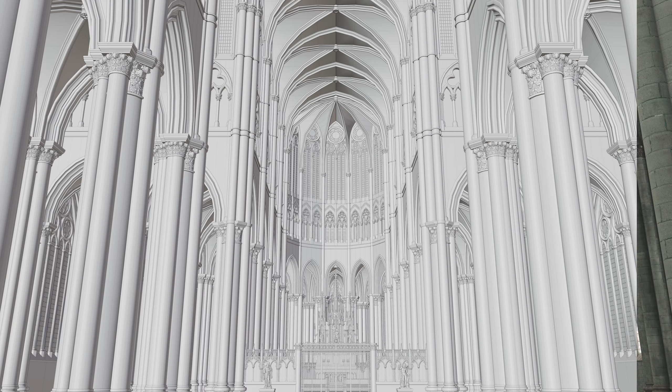These are a few clips from one of my latest projects aimed at rebuilding almost entirely a Gothic cathedral within Blender. But what does it really mean to engage into something this big, and how can we do that effectively? Let me share my perspective.

First of all, these projects require quite a significant amount of effort. To give you a bit of context, building this scene took me around 60 hours of work, of which I would say approximately 80% were spent modeling, while the rest were used either texturing or lighting or compositing.

The final scene contains nearly 21,000 objects organized into 201 collections. There are as well 50 different materials in use and 126 node groups, 41 of which are geometry node systems. Now, some of these are indeed just variants, or to put it differently, duplicates of a main asset with just little tweaks, but nevertheless, these numbers should give you quite the sense of the magnitude of the work involved.

In the end, am I pleased with the final outcome? Well, as always, it's a yes and no. One of the most difficult parts in dealing with big projects in general is to keep quality consistent throughout the process, whether you are at hour 5 or at hour 50. Exhaustion can indeed kill a project.

To give you an example, I spent so much of my energies into modeling the main bits of the architecture, making sure that all the elements were arranged and interconnected in a way that would make sense, that when it came to texturing, for instance, the stained glasses, which is a big part for every Gothic cathedral, I really struggled in coming up with an effective workflow, even though I think I partly did in the end, to the point I have been on the edge a couple of times about whether to skip this step altogether.

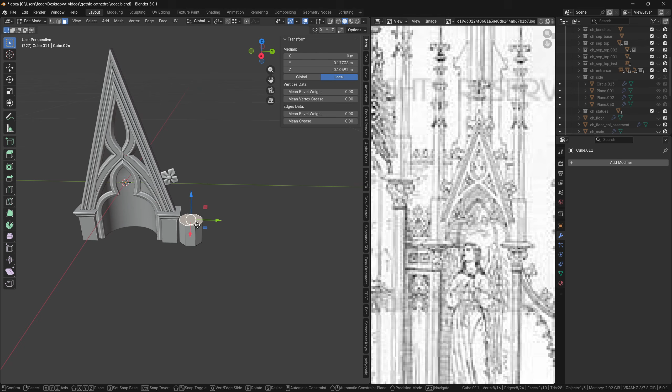So yes, in undertaking a big task, the first thing to me would be to be aware, prepared and trained in advance to face the amount of effort that that specific project will likely require. The second important element is to have some degree of visual clarity about the final intended result. Needless to say, some time needs indeed to be spent into the research department. For this purpose, I generally leverage tools like Pinterest to create some boards and start exploring references.

I even have a specific board called Hooks, in which I save images I may not be directly interested in, but that serve as a sort of an entry point thematically into a specific concept or visual representation I want to expand upon. Having said that, my target for this project wasn't anything specific, as it would have been instead in a proper replica, but rather a custom cathedral with inspiration being taken from different real sites. To mention a few, the cathedrals of Amiens and Reims in France and Cologne in Germany.

Aside from references, one essential bit of the entire planning process is always to be aware as much as possible of what one is really looking and getting into. If I had to state it explicitly, it would go like this. To make it, you need first to be able to name it.

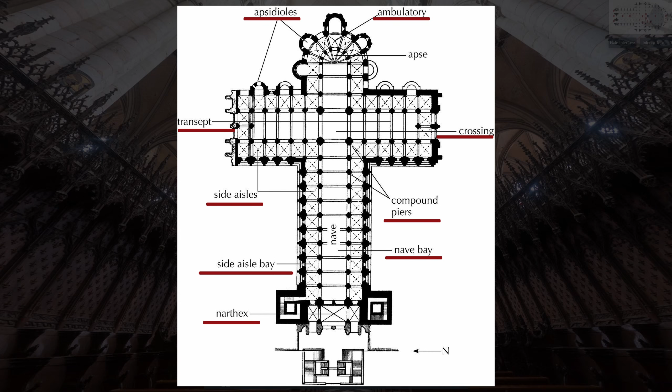This is not simply a mere exercise in style, but more that the moment you become aware of the presence of a certain specific element or component within a more complex structure, knowing its name is a solid proof to yourself that you will properly account for that element, whether in your modeling or texturing process. This usually draws a line between a final output that appears plausible and one which seems to be okay, but for which you can't really put your finger on what is actually off.

Given that, I started the whole process by taking a floor plan of a cathedral, Amiens in this case, trying to figure out my portion of interest. Based on my personal perception and taste, the choir and the apse would be the most interesting parts.

Not to disregard the rose windows, which are indeed peculiar in a Gothic cathedral, but I really wanted to come up with a final shot that would emphasize the concept of spatial depth and dimension, moving from the central nave, where I would put my main camera, crossing the transept into the choir, then into the apse through the ambulatory, and finally peeking into the chapels.

So I knew roughly that I had to reproduce this much of a cathedral, and I started looking into how to decompose this structure into its own basic elements. In particular, by looking at this section here, the central nave and the lateral aisles, it was easy to see that once built, its repetition would allow to make up for the majority of the entire composition. So I zoomed in and focused on it.

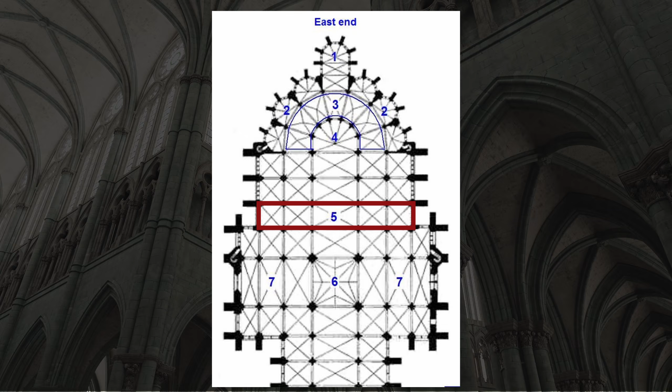And these are the basic elements I knew I had to begin with. The arcade standing on its piers, the midsection or triforium, and the clerestory with its beautiful windows and traceries. On top of everything, the ribbed vault.

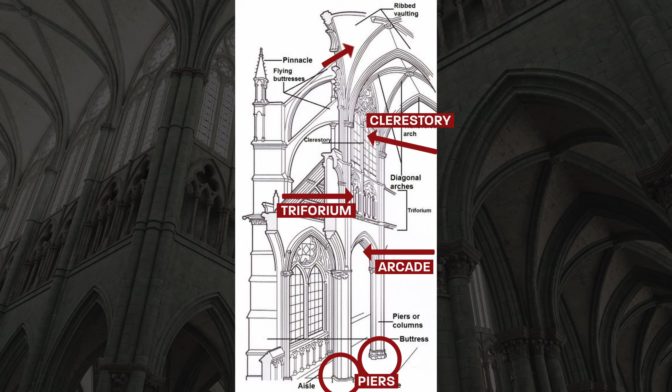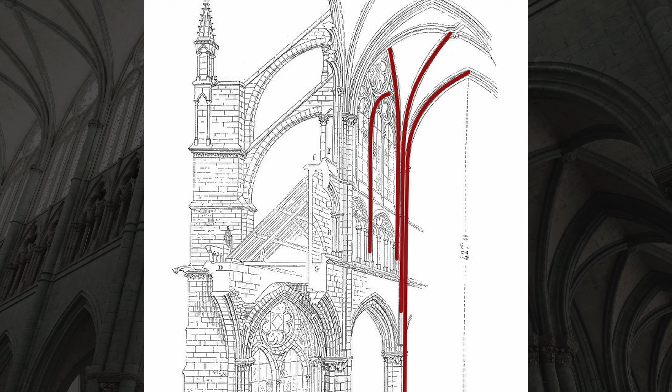And what I was particularly interested in was trying to replicate the amazing interplay of elements, with the ribs of the vault transitioning into the cluster of columns that would progressively descend down the whole structure right into the piers of the arcade. At this point, I had a plan. To start from the single constituent as to form this first composite element, which would then be used to build the main parts of the cathedral, or at least of my portion of interest.

Let's now dive a bit into the modeling part of the project. This comprises both basic modeling techniques, and I will not bore you with this. In fact, you can check this older video here in case you wish to look into any of that, and more advanced stuff. In fact, to deal with larger projects, it's always useful to have a few tricks up the sleeves. Think about, for instance, the need to optimize a scene to make it manageable also at the later stages of the process.

My first goal was to have in place all the different elements taking part in forming the nave of the cathedral with its subsections. I started almost from the ground up, building the main arcade first and then moving up to model the different pieces of the triforium. At this stage, I was just working on the basic shapes without including yet any elaborated model, such as the decorations for the columns' capitals. Let me stress how important it is to have everything properly named and diligently organized in collections.

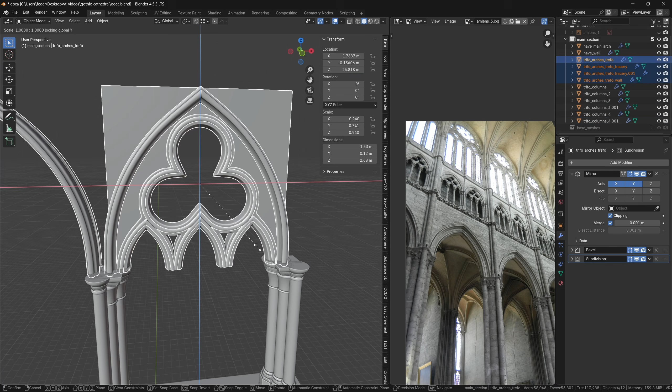After building the triforium, I moved on to the clerestory. A big part of this is modeling the different pieces of the tracery that is put together along with the windows, and I tried to do that in the most, so to speak, organic way, by having shapes that are actually connected in their own geometries, or let's say topologically, much like it is in real life. Now, this is not strictly needed, as one could simply place the different elements on top or near each other, but I thought that doing it properly would give it a visual boost, plus it is a good exercise in terms of flow and polygons management.

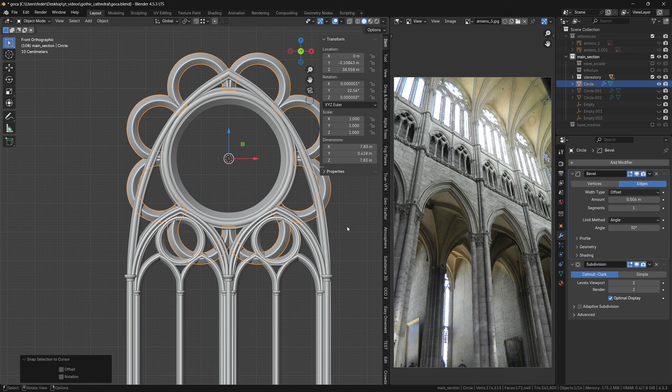As I mentioned earlier, one of my goals was to try to replicate the complex interplay of the different elements being conceptually interconnected with each other. Hence, I started working right away on all those pieces that would contribute to that overall, and that taken individually may not appear as important. In all of this, scale is essential. When I work on these kind of things, I always do that in a real-world scale. And that is going to have an impact on almost everything, from bevels to textures to the way light interacts with the models.

With the tracery done, I started adding simple planes to represent the windows. In the end, I would replace all the individual planes with just a single one, since it is easier to manage, especially when texturing stained glasses. With the clerestory done, it was time to move to the vault. Here, the technique is the one I already used in a couple of older videos, feel free to check them for reference. One little trick is in modeling the profile of the vault's ribs.

I approached it like this. I hand-modeled a piece of geometry based on the specific reference I chose, and I placed it into its own collection, to be reused later on. I then isolated just the top edge, deleted the rest, placed it at the center of the 3D space and converted it into a curve. At this point, I could take my rib, which needs to be a curve as well, and I used the profile I just created as the input in the bevel object field.

I adjusted the rotation, and to make sure it was displayed properly on the rib, I applied the scale of the latter. This, apart from being a non-destructive way of modeling, allows for great flexibility and reusability.

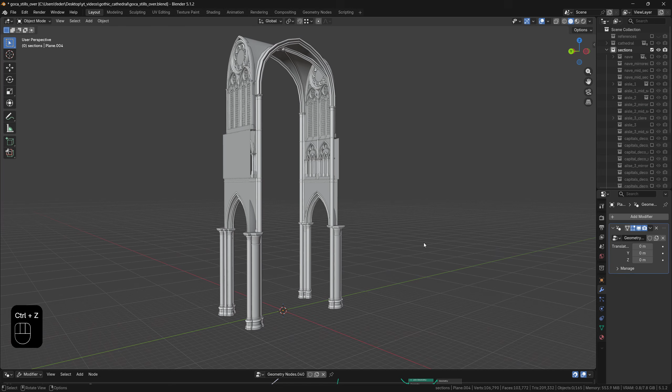Since this entire composition will need to be repeated in an array fashion to create the overall shape of the choir, I needed to account for the fact that some of the meshes are placed right at the middle of what will be the consecutive iterations of the structure. Which means that if I take everything all together and just repeat it bluntly, a part of the geometry will necessarily overlap.

To avoid this, I decided to split the block into two logical sections, isolating those meshes which lie in the middle of the block from the rest. This will allow me to manage the iterations of the two sections separately, as we will see in a minute, and avoid any geometry overlap.

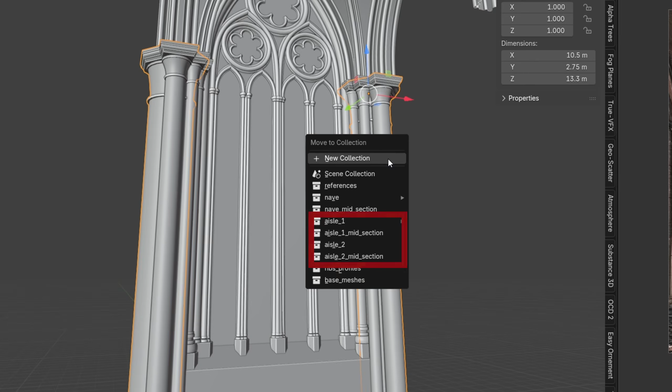With the same logic, I approached the modeling of the two aisles, again leveraging on the logical subdivision between a midsection and the rest of the structure to avoid overlapping geometry further in the process.

With the main parts basically completed, it was time now to move to some finer details, such as the decorations for the capitals. Apart from the modeling itself, which was performed along the lines of the non-destructive workflow I used for the leaves of the Corinthian capital, as demonstrated in this video here, the important bits were mainly two.

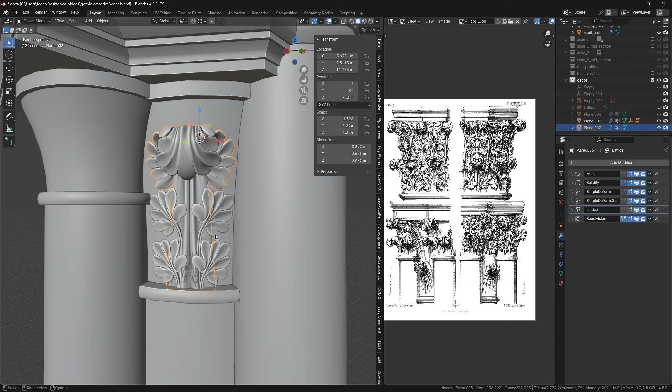The first, to apply also in this case the distinction between what will be in the middle of each repeated iteration of the block and what will not. And the second, to optimize the overall poly count.

With regards to the latter, the obvious choice was to use geometry nodes, which I used at first to build the base capital by instancing the desired amount of leaves in a circular fashion, and then to allow for multiple iterations within the scene of these base capitals with little to no increase in the amount of geometry around.

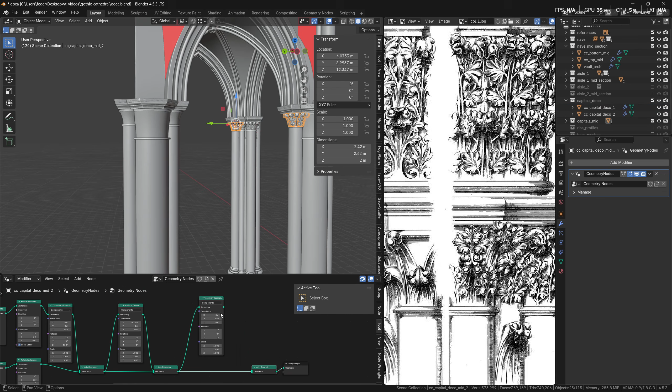The same concepts were applied for both the decorations of the columns of the piers and of the aisles, and for the decorations of the columns of the triforium and clerestory. Finally, the base structure was complete and ready to be used in the next steps.

For the choir, I created a new geometry node system. My intention was pretty clear in that I wanted to use two mesh line nodes to control separately the different collections depending on whether they belong to the midsection of the whole block or not. Hence, I started joining together the base nave and its mirror counterparts, feeding the result into the instance on points node linked to the first mesh line node.

I then duplicated both the mesh line and instance on points nodes, and I joined them back into the original branch of the node tree with a join geometry node. I would use this second branch to control the different midsections of the cathedral. With this logic, I started adding the different pieces together, including the aisles 1 and 2, again with the respective mirror instances and the decorations for the capitals as well.

With these two macro blocks ready, I could now work on increasing the iterations count for both mesh line nodes separately as to create the entire choir structure without having to deal with overlapping geometry and in an optimized way when it comes to the overall poly count of the model.

With the choir ready, I moved on and started modeling the apse. For that, the fundamental part was working on its so-called umbrella shape, and in case you might need precise guidance on this, you can reference this video here. The rest is similar to what was already shown for the nave section.

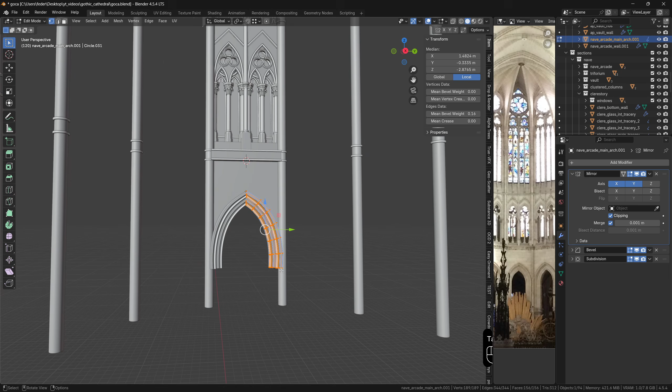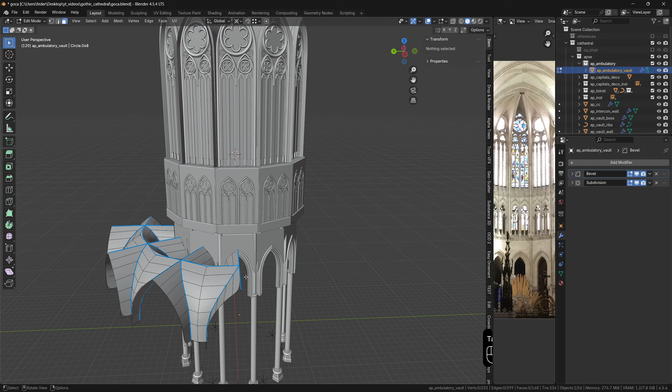In particular, I first modeled the different items of a singular section of the apse, from the clerestory to the triforium and the arcade, and this was my original collection of meshes, and I then instanced the other iterations by simply creating instances of this original collection and rotating the instances around a pivot point placed at the center of the apse itself. I then proceeded to model the ambulatory and its sets of vaults displaced around the circular shape of the apse, and finally the chapels.

The techniques I used in both cases are similar to what I did for the nave and the apse, where I leverage a lot on instances to be applied to every repeatable section as to optimize the overall poly count as much as possible, keeping the whole project manageable even with an already large number of objects in the scene.

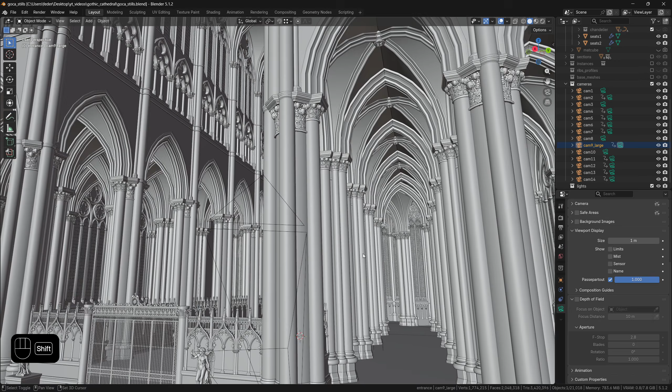Let's now talk a bit about texturing. The main materials for the cathedral are conceptually not that many. There needs to be for sure a tiled stone material, which is going to be predominant in the composition, to be applied to vaults, columns and piers, a brick and plaster material for the vaults, something for the floor, and then stained glasses. For the tiled stone material, I downloaded from the web a nice scanned set of PBR textures and I imported them into Blender.

Since I was using lots of instances throughout the composition and to avoid obvious repetitions with displayed textures, I separated the output of the texture coordinate node into the X, Y, and Z channels, and I then recombined them, adding just a bit of randomness by exploiting the random output of the object info node in combination with some math operation to be performed at each channel level.

To emphasize the sense of separation among the different stones of the original set of textures, I used the roughness map as a source of information to be fed into a color ramp node to try to isolate the different crevices, finally to be used as a mask in a color mix node to make them more evident in the final output. I then imported some grunge maps to be mixed on top of both the albedo and roughness maps of the main material, just to add a bit of dirt and muddiness to its overall look. With this in place, I started applying the stone material where needed to all the different meshes in the composition.

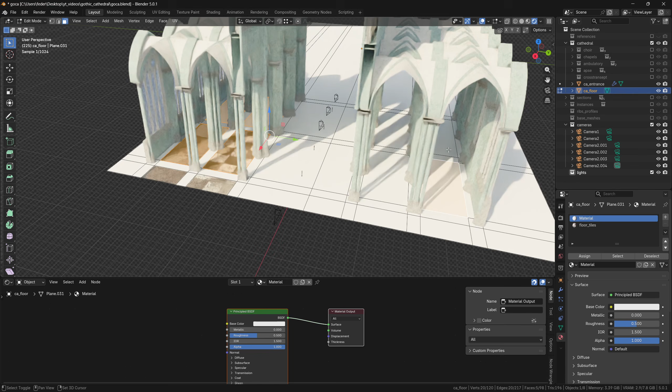With that done, I brought everything into Blender and I started applying the floor material to each different section of the pavement, adjusting the scale as needed. Now onto the stained glasses. For this, I tried a few different workflows before coming up with a decent solution. At first, I tried to create my own patterns by using alpha packs I got from the web.

I imported the ones I chose into Photoshop to create an albedo map and an updated alpha mask. With those ready, I moved to Substance Painter, where I leveraged both the paint along path and standard fill layers to populate my windows with the chosen patterns. Finally, I exported the resulting albedo and normal maps to be tested in Blender, using them as inputs in a generic glass material shader.

I then simply iterated the process to have all the desired patterns in place. In Blender, I started playing around with the transmission factor of the BSDF shader to give the windows a bit of transparency, and with the emission strength factor and color input as well.

This kind of workflow gives a lot of control on the patterns to be displayed, but it requires a lot of effort to get a decent amount of variation to begin with. And whenever I needed a simple change, for instance to the palette of chosen colors for each pattern, I would need to go back and forth between different softwares. Plus, it was pretty hard to achieve an acceptable level of complexity with regards to the patterns themselves, as I was limited by many external factors such as the alphas available, their quality, and how easy it would be to repurpose them for this specific need.

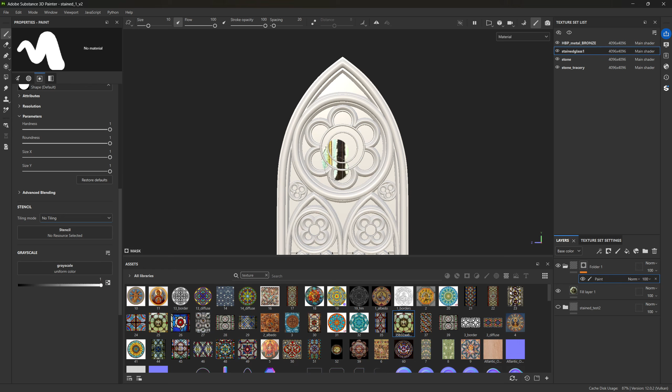In Painter it would go like this. I imported the chosen image as a texture and added a fill layer with just the color and roughness channels enabled. I put the roughness down to 0 and sourced my texture as the base color. I then switched the projection to triplanar, added the layer to a group with a black mask on it, and added to this mask a paint layer to define where the texture would need to be displayed. I would then rescale and reposition the texture based on my needs.

On the fill layer containing the texture, I added a levels filter to control its overall look, and then made it into an anchor point. This would allow me to create another layer containing just the height information. I added a black mask here too, with a fill layer used to load the information contained in the anchor point just created, and use it to generate reliefs.

By doing this, the original albedo texture would be automatically converted into a grayscale image that can be used to produce bumps coherently with the image pattern itself. At this point, I used a blur filter to make the bump map as smooth as possible without losing too many details. This is a pretty quick way to create complex patterns, mostly in a non-destructive way, where it is easier to try out and switch different patterns with just a few clicks.

In Blender, I imported the albedo and normal maps produced in Painter. Here I used the color texture also as the input for the emission color, and started playing around with the emission strength, with transmissions weight, and with the metallic factor of the shader to achieve the desired result.

The final result is indeed a bit washed out, and that's due to the fact that I still had to prefer light over look, otherwise the shot would have been way too dark. But anyway, I intend to build upon this foundation for future projects, so let's consider this just a test for now. After all of this modeling and texturing, and after having found some decent spots for my cameras and added just a simple HDRI for the overall lighting of the scene, this finally was the end result.